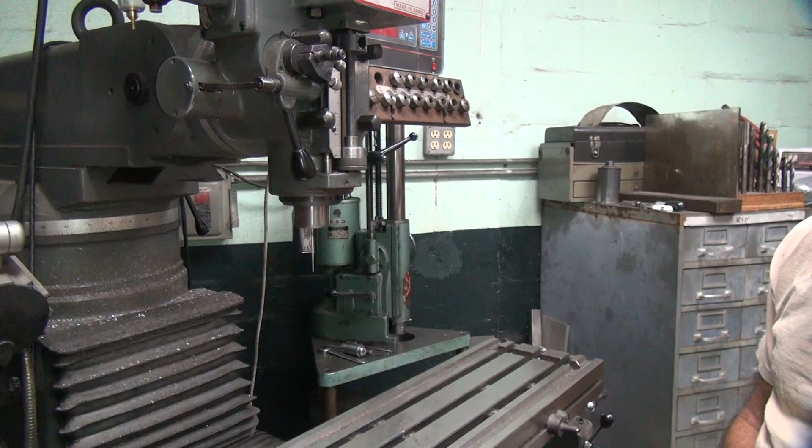Now you got a light on. Yep, lights on, both of them. Okay, we're straightening a needle that he doesn't want me to use, but I don't give a shit. I'm still gonna straighten it. So I put it in my collet up in here, and I'm above the point where I think it's bent.

So you roll it on the thing here. You can look at where you think it's bent. Looks like it's bent right at the black area here to me. So I put it just above the black area. It'd be nice if I had a chuck I could use, but I don't think it's that small, so we have to use a collet.

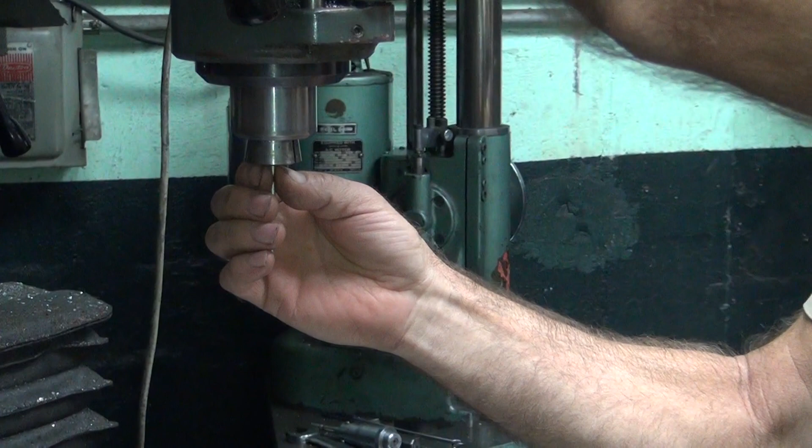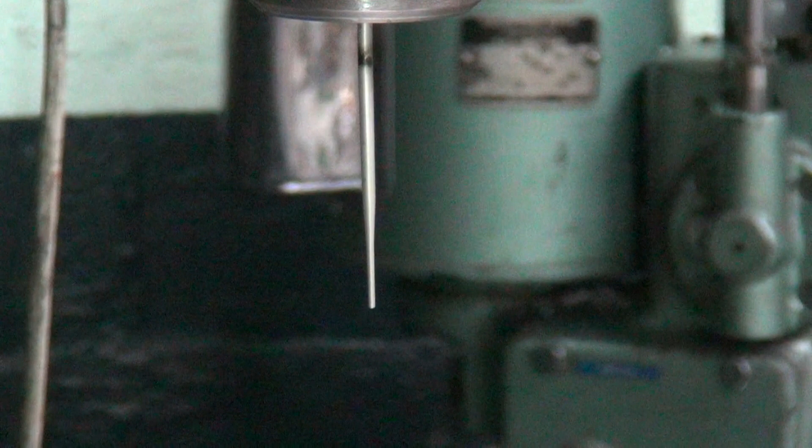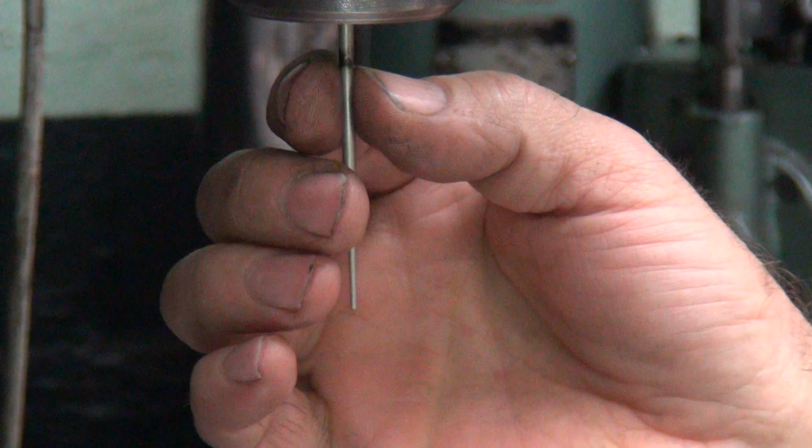So then you just turn the machine on, look at it. You see all the bending is right basically where the black is. It's got the wobblies. It's got the wobble to it. Oh yeah. It looks like it's bent right at the top of the black spot. So we're going to put our thumbnail right on that spot.

Right spot or too low? Too low. What I don't like about this design, you can't control exactly where it pinches at. Okay, that looks like the right spot. See where it's at? Oh yeah, yeah. Needle tuning.

You can actually put an indicator on there if you want, which would be a lot easier to do probably in the long run. I was thinking about that. Just keep doing like I'm doing it.

Fine tuning needle runout. See, that's close enough to run it right there. But it just bounces around the hole anyway. All they do is bounce around in a hole. They're not precisely held anyway. But we can make it closer than we got. Put it where you can see, I guess.

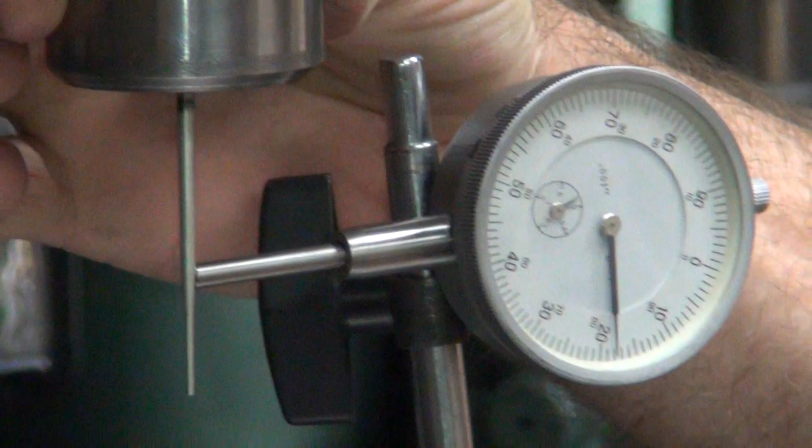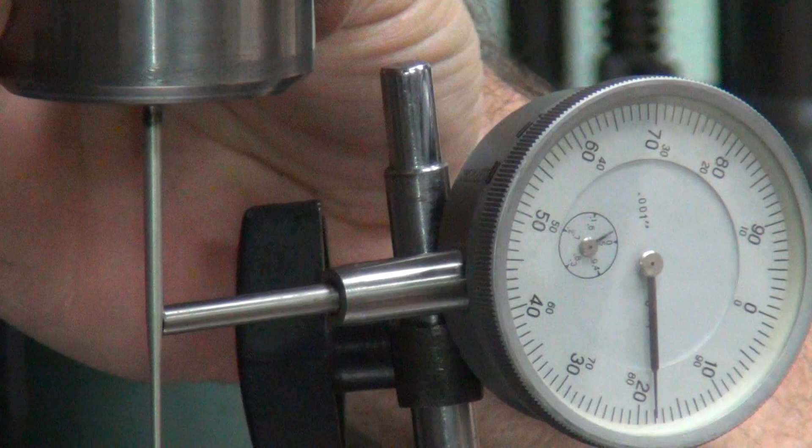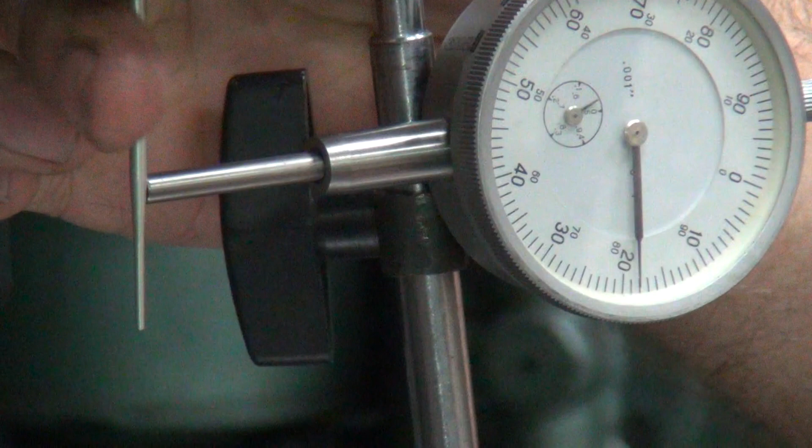So the high spot is here, which means I have to go that way. The low spot over here means I move it toward me, so I push this direction. See how the needle goes up? Mm-hmm. Now you want to go about halfway is what we're trying to get to. You can see how tough the needles are.

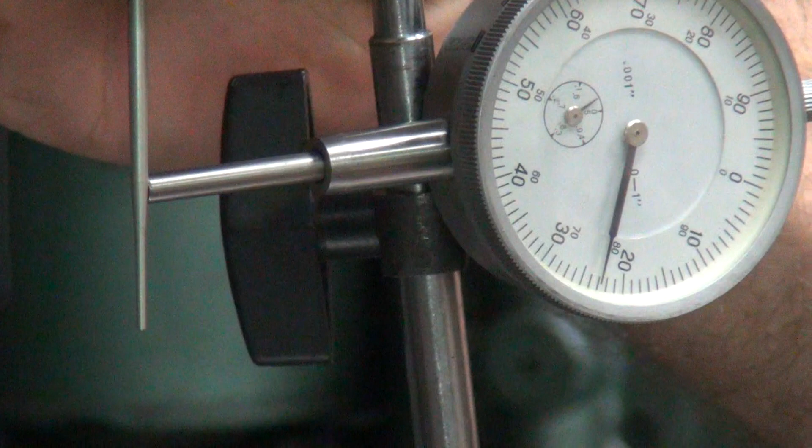If you want to know if you make it worse or better, you mark it so you know where you're at. You get to a number, I know where I'm at. So we got 1 thou. We're dealing with thousandths right now. See? Well, it's actually pretty damn good.

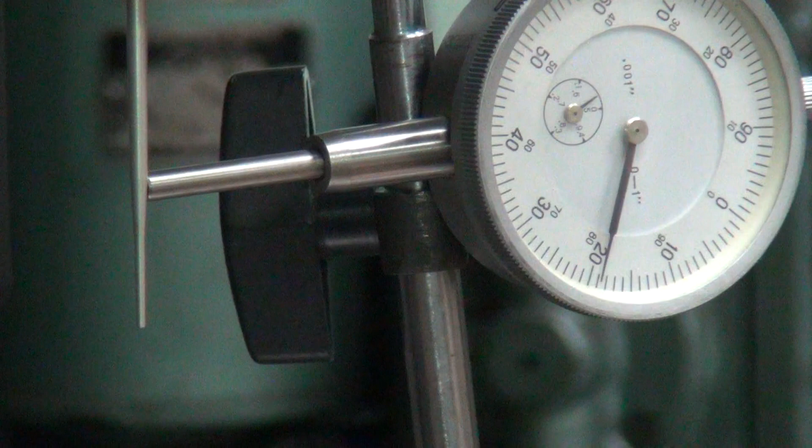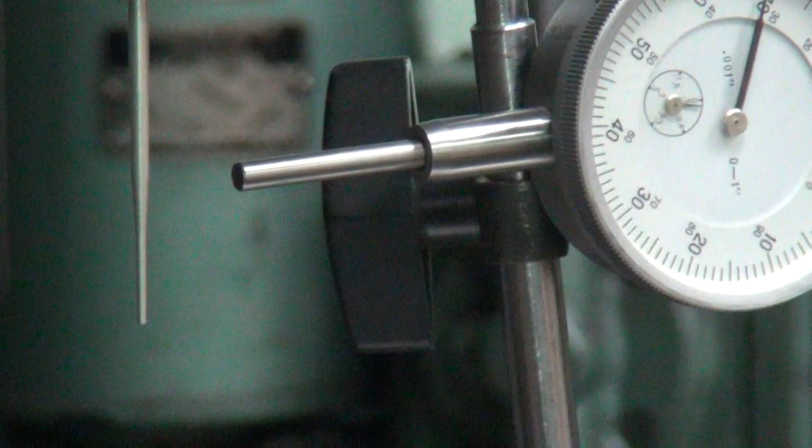You broke my needle. That's awesome. So there's one bent needle within a half a thou or within a thou of being straight. You think? Bent to unbent. Yeah, bent to unbent.

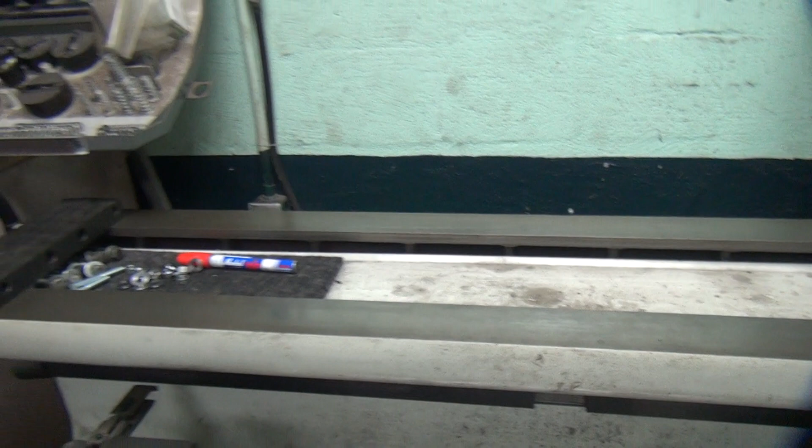Roll it on the table and see if it does any more stupid wobbling. See how it looks good. This table's pretty rough to be rolling on. Roll on top of the table over there. Flat table. Roll up on top of the weight now. Does it look pretty flat for you? Just by feel, it looks. Yeah, actually, it looks really good.

You see how tough that material is they make it out of. It's pretty damn stout. There's a lot of pressure putting on that to bend it. Check this out. That's pretty straight, huh? Yeah, it's not hesitating. Rolls evenly. Okay. You happy now? Can we reuse it? Yes. You're okay now? I'm okay.

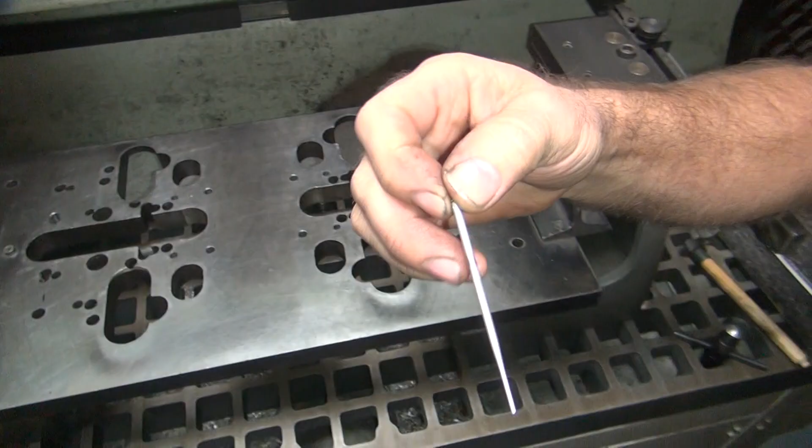So if I didn't tell you this before, you wouldn't know anyway. That's correct. But I knew, and therefore, it made a difference. But now it does not. So you're happy with the half a thou runout? You can tolerate that? I can tolerate that. Okay. Good. I'm glad you can tolerate that.

I'm curious as to how much a factory needle has. You'd be surprised how much they rattle around. That's what I'm starting to think. Okay. Let's see what I did. You moved it down one notch. One step richer. And what size needle is that? Stock. Stock needle, one step richer.

So when you pull it out of the hole here, it's higher up, it gets richer. The hole gets bigger. Yeah. When you pull it out, it gets bigger. Gotcha. You put more fuel. So when you lower the clip, the needle goes up because the clip doesn't move; it stays constant. So if you go up that way, it reverses it. So there you go. Now we are one step richer on the needle.

You can go all the way to the bottom if you want to, but we just wouldn't want. That's enough to start with. And I'm going to order up the other one anyway. And the 45 and 48 are the same, but not the 42. I thought the 42 and 45 were the same. No, it's 45 and 48 are the same. So don't forget. So when you go down to your local Harley Davidson dealership that stocks parts, make sure you order a 45 or 48 needle and not a 42.

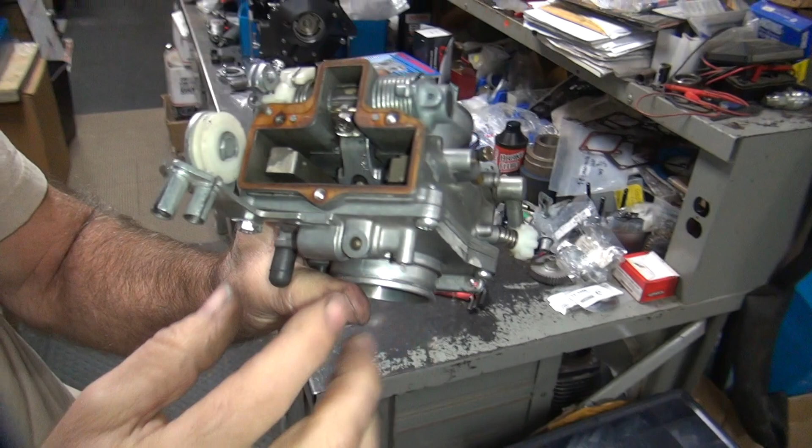Okay, there's your little washer. Now that is important to have that washer in there because that's preset height. It's built in. Okay, so now we can go ahead and drop that in the hole. See the hole way down in there? So you drop the needle back in the hole. See, it gets hung up on the washer. Yeah.

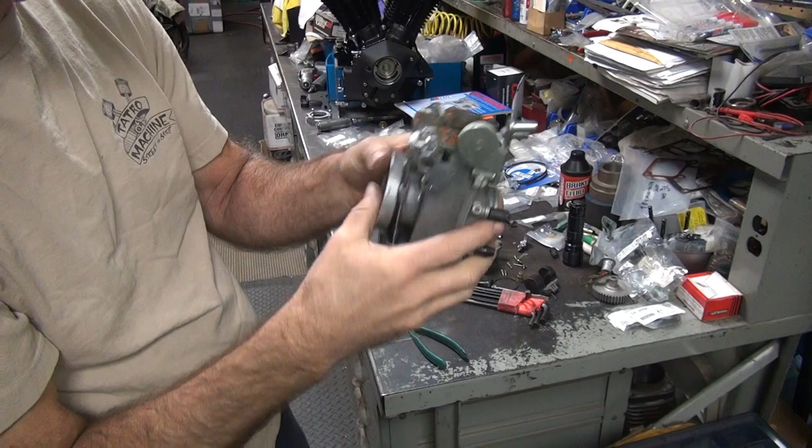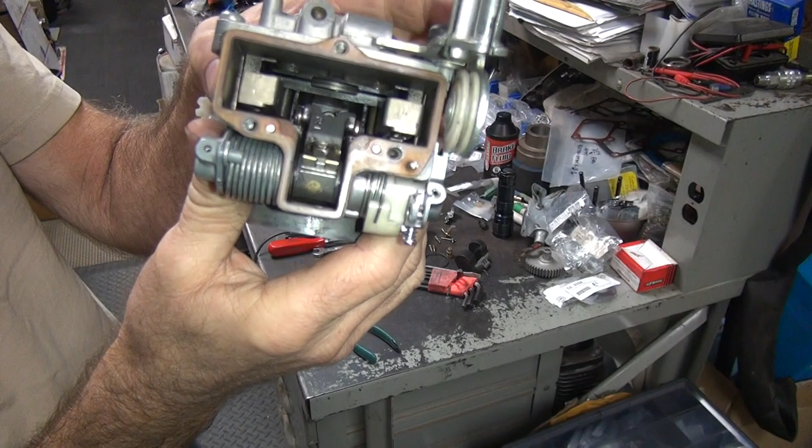So you can either pull the needle up, let the washer drop down, and drop the needle, or you can come over here and unadjust the slide. At some point, the needle will drop. And it didn't quite drop. There it goes. Light push. Because if you drop the lever down, there's more room for the needle to go through. See how it's in there now? Okay, now, if you wiggle it like this, did that little clip fall in or is it still hanging up there? I can't see.

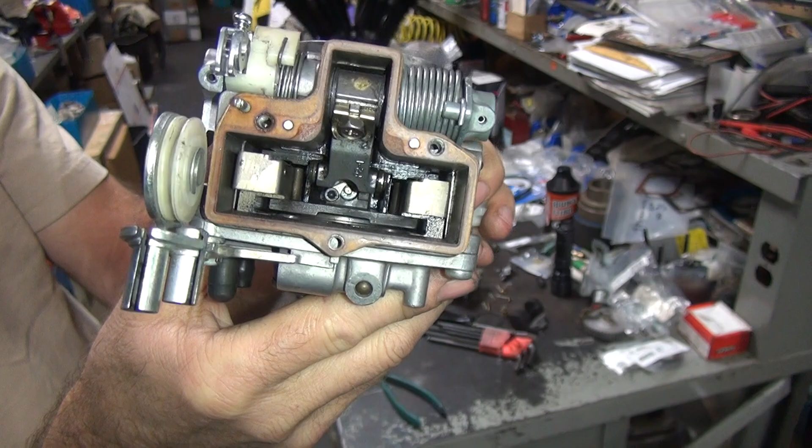You have to look at the camera. I can't see, man. I'm blind. You can't see, you're blind. I'm blind too, because I can't see because it's dark.

There. See that little lever flip down there? Because I'm using gravity. Oh, the little, yes. Okay. Yeah, it drops, so it locks the needle in place. Yeah, that holds on to the top of the clip. Can't let it come out. Awesome. Gotcha. So I let gravity work for me there because I knew where it was. Okay, now we had that long Allen wrench someplace. There's a wrench somewhere. It might be over my pile over here. I don't remember where I put it.

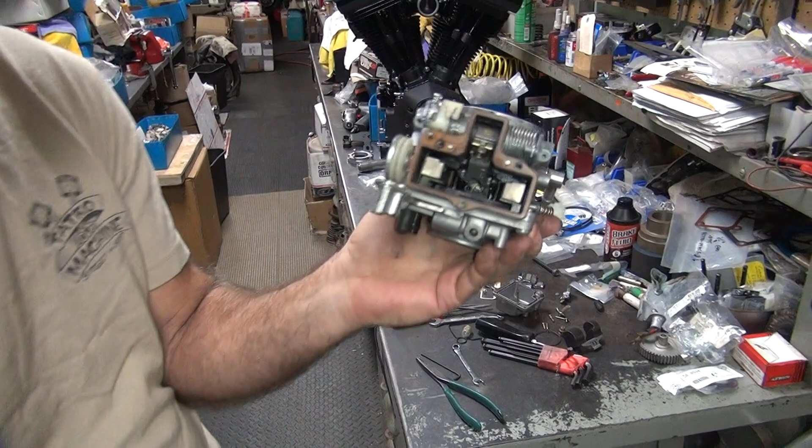Okay, now you tighten this up. See, I don't have the right wrench. We make a correct wrench right here. Tough enough. Now you look at it to make sure the needle didn't move. Appears the little lever thing is in the right spot. Yep. Okay, there we go. And when you open this thing up, right there, they really do float around in there. You see the needle moving around? Oh yeah, big time. Do you think that half a thou out of round is going to hurt that either? No. As long as it goes evenly in the hole, it don't really matter. All right. So they don't have to be perfectly straight, even though we get it pretty good.

Let's see. I need to put the idle speed back up because I turned it way down. Remember? Back off. Okay. So I got a little bit of air flowing through there. I don't know what I need, so I just give it a little bit. You may have to make a quick adjustment when it starts running. Okay. Now we have the rest of the stuff we got to put together. We got the accelerator pump in here. Spring on there. The rod is still in here. So now we need basically our float, which we don't have yet. We don't have a float needle.

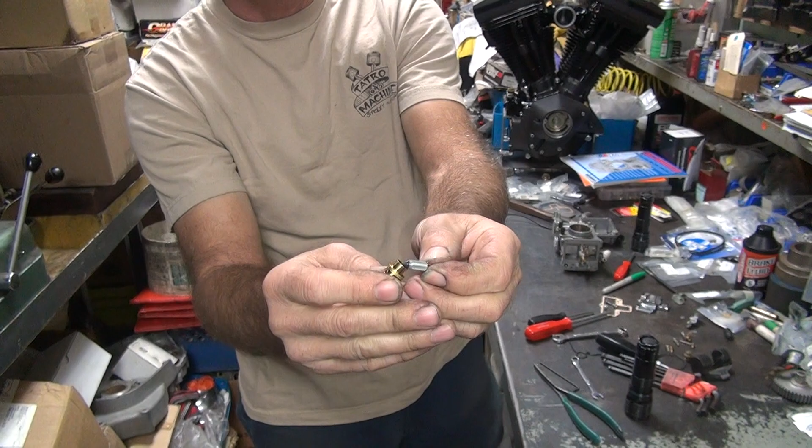And we have a brand new float needle over here that you wanted, because that other one was defective. It was old. And it was missing the washer. It was missing the O-ring. Now, the lack of O-ring seal was probably the biggest thing. So there's what a new one looks like. Nice fresh tip. Oh yeah. So this goes down inside the hole. Just push it down. There should be some kind of a retention device that holds that in. Not these broken pieces I did. Those are custom. Okay, there's a pin here.

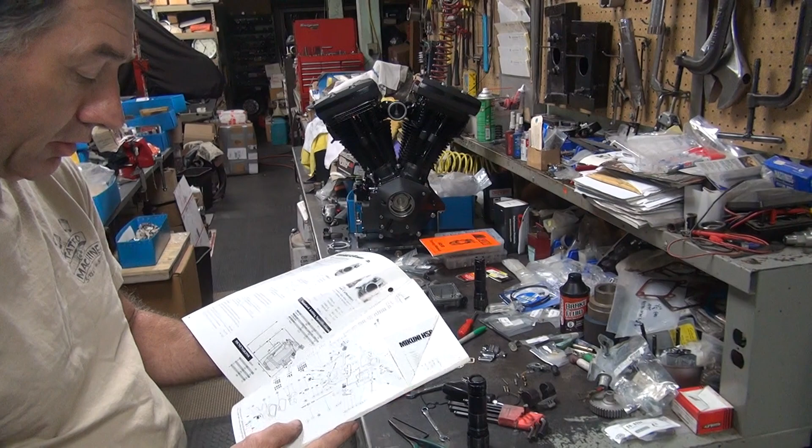So I don't see the thing that holds the needle in. Let's look at the diagram. Looks to me like there's probably just a screw that does it. Looks like it just has a flathead screw that hits against it. So go in the comic book and see what holds it in. Let's see here. I'm thinking that little screw right there on the side is what holds it in. That'd be number 64. 64 is a VM 12 216. Screw with washer. It could be a needle valve.

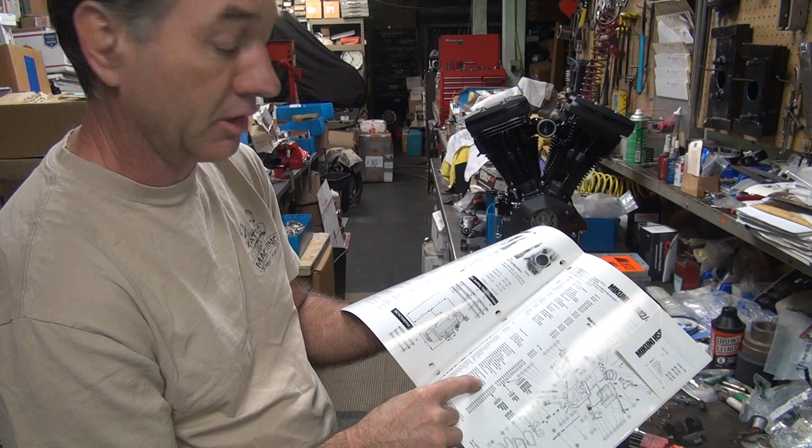It's gone now. I lost it. Fell in the hole, but it won't come out. I like how the carburetor stands up. Oh yeah, self-standing. Self-supporting. Yeah, it's got a little lean to it. Perfect. So come here at an angle. You see. Oh, that's even the right size screw. That's even better. Look at that. I like that. I'm thinking that's the right part.

Now you see a little screwdriver slot right there? Yeah. That adjusts the squirter right there, the direction of where it squirts. So if it's not squirting in the center, it squirts off the side. Go in here and adjust that and put it back in. Really? Yeah, that's how that works. Nice. It's got like an O-ring on it that holds it.

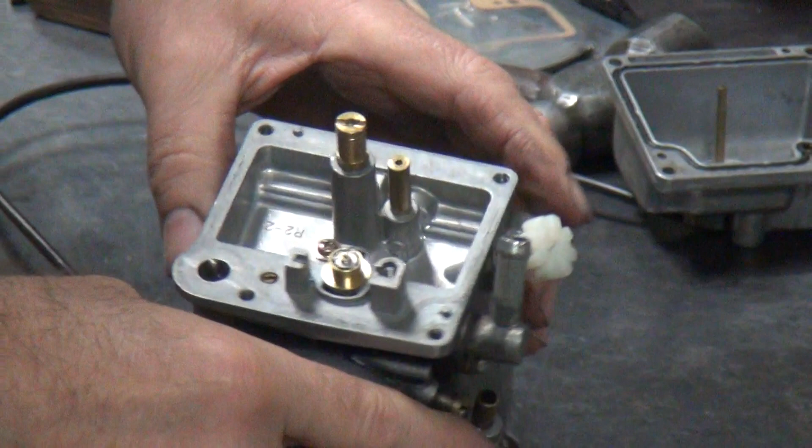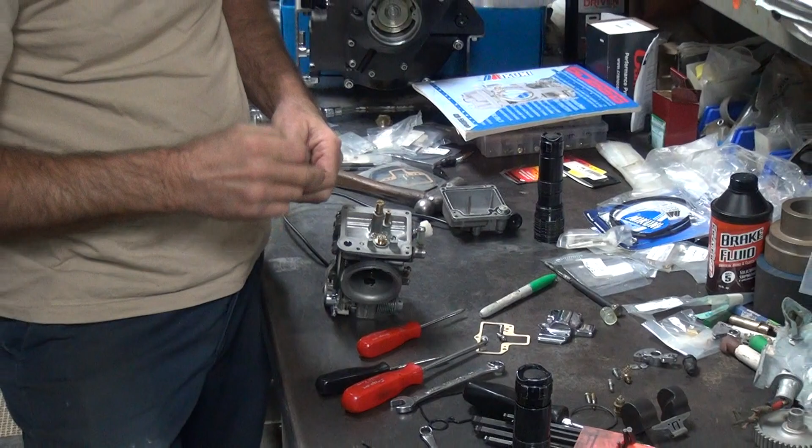Simple. Okay, so we have our needle, we have our main jet, we have our needle jet, or needle valve in there. I call that a jet. They call it jet, needle jet, or something. I forget what they call it. It's a damn needle. So we got that all in there. Okay, so we're pretty good. Now, you know what we don't have? We don't have a float needle retaining screw. That might be where that screw is actually supposed to go.

So here's our float. Probably should have been something that supports it. This has a little hook on it. Probably goes right over here like this. Yeah, right on top of that little. Yep, that's it. Ding, ding, ding. Winner, winner, chicken dinner. Is there a little pin that goes? Yeah, but the screw I think we just used on something else. Whoops.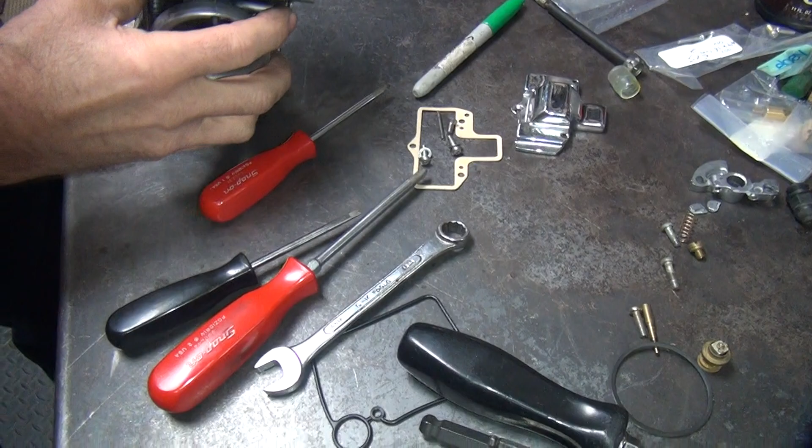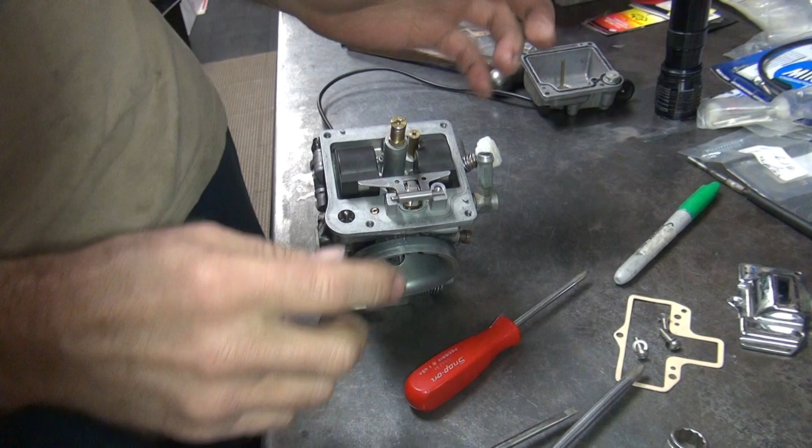I bet you that screw we used goes on top of this. Or there's another screw that we don't have. I guarantee there's another screw that we're missing right now, because I don't see it in all the parts that came out today. And I know they would have been there originally, because we have all these other valuable parts sitting here. It's hard to believe we don't have the one we need. And my guess is that number has the same identical number on it. It seems likely. It appears to be two different ones though.

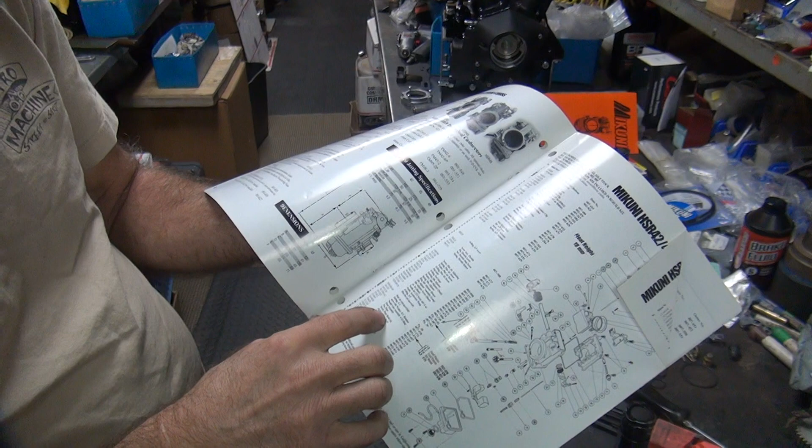Really? See, the 64 had that large washer, which we did use on a needle valve. So we used the right one in the right place. But the little small one here, number 68, we do not have. So 68 appears to be a screw float, 4. That's a float bowl then. No, I don't think that's what we're looking for. We're looking for the one that holds a needle in there. So what's 68? That's not the same one that goes in the float. These are 74. These are float. It takes 4 of those. I think they got their numbers screwed up.

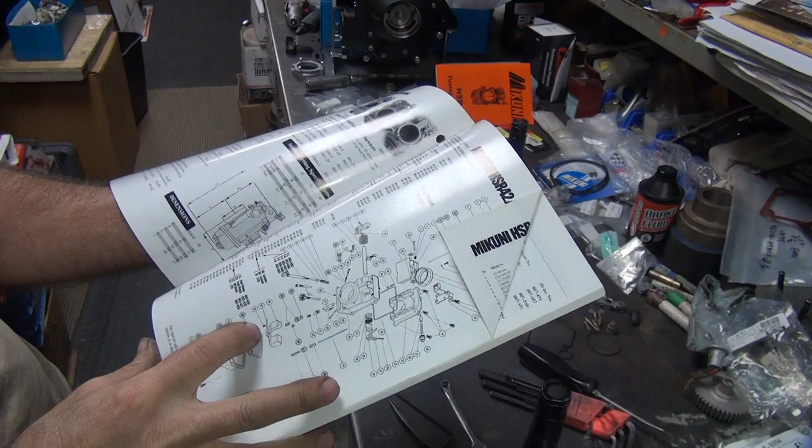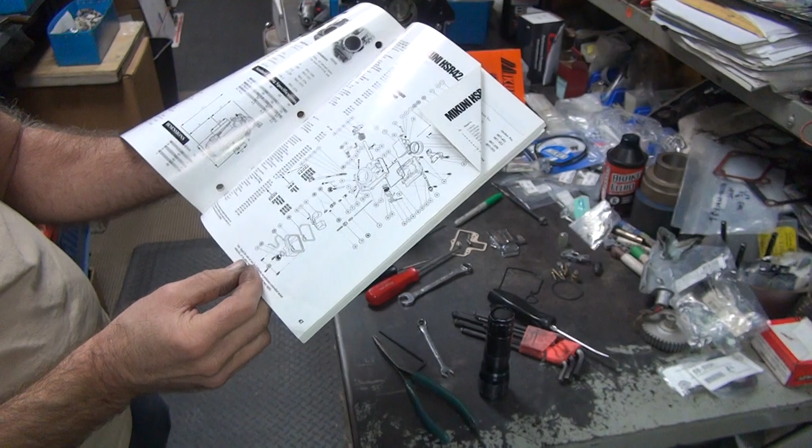Packing float bowl, screw float bowl 4. That's not a float bowl screw. Number 74 is a float bowl screw. Screw float bowl 4. So they have 8 float bowl screws where there's only 4 used. So I'm thinking that description's off. Pretty sure it's not quite right, when Mr. Mikuni translated that into English.

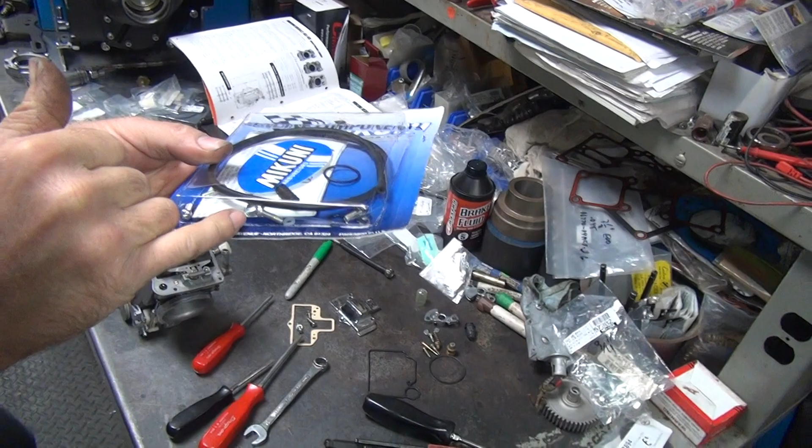So it appears that we have another float retention screw right here. I'm thinking that might be the same size screw that we're going to need to hold that pin on there, even though they say it's not the same one. I'm not above using the incorrect screw if that's the one we got to use. Okay, it appears to be the only small screw in there. Now we can go over here and look through my junk pile. I don't think I bought any of those. I have lots of other stuff over here.

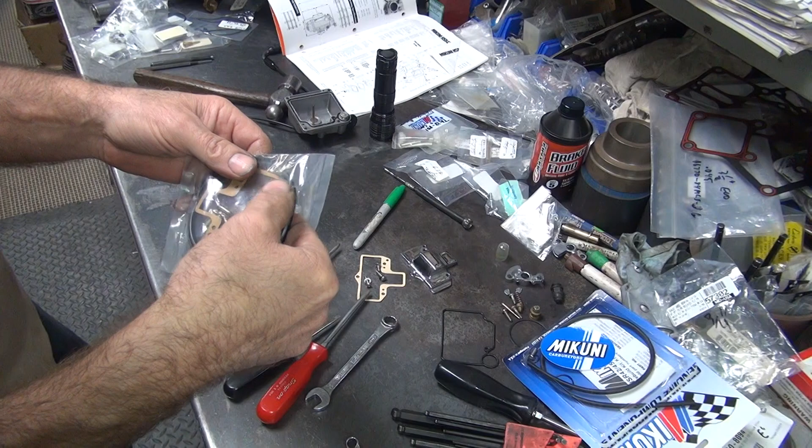Ooh, look at that. What's that all about? Oh, there we go. There's another one of those screws. Let's take it out of there. Appears to be a lot of these. Let's not rob that packaging. Well, I'm still missing parts out of that kit. And that appears to be the same thing, and it looks large enough to cover over the pin. Well, this one's all in a bag. It's not going to fall out. This one here is going to fall out, so I'm going to use this one. The trick is to get it out where I can find it again. There's that new needle valve washer we should have put in there. It's too late now.

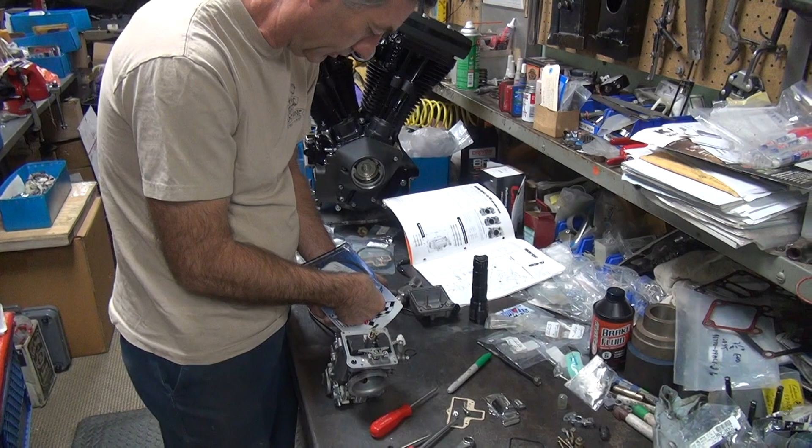Okay, I took one of the float bowl screws, got the washer on it. It appears to be doing the job for a float pivot screw. They did say with the float bowl screws they're supposed to be in there, so that's right. Okay, so now you got to set your float. Remember how many millimeters it was? 18. 18? 18 millimeters. How much is 18 millimeters? 2 less than 20. But more than 17, right? One more than 17. I can use this one over here.

Got my metric conversion machine over here, see? So you put on millimeter. You go to 18.02. .02. 18 even, see? And you convert: 710 thousandths. Got that? I got it. 700 thousandths. Take your metric conversion machine over here, which has no metric on it. You go down 7 lines, that's 700 thousandths. That's what your float should be at.

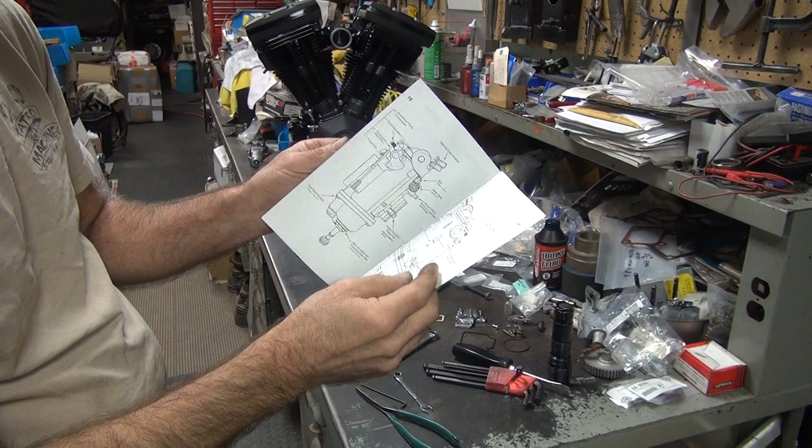There's that piece I broke off. Ooh, yeah. You don't need that extra weight. I was saving some weight. Well, that makes the bike faster.

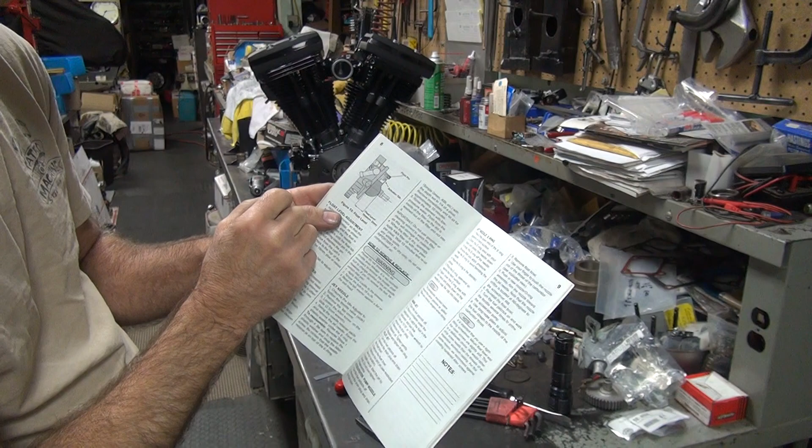Okay, so center line, plus or minus 2 millimeters. That's the center line of the bowl. So it's in line with the jet. So it wants you to measure it with the carb laying down, at an angle like this. And you have a 2 millimeter variable. And we're at 700 right there. See right there? Let's get the camera up where I can see it. Oh, yes. That's right. Just a tick over that 7 line, right on the 7 line, depending on where your float stops at.

See that? If you put gravity on it, it'll drop. See how it drops? My arm's in the way now, but it drops because now the weight of the float is overcoming the spring. Okay, so it's adjusted correctly. Which makes sense because it was all brand new already, parts were in there. Brand new setting from the factory. So it didn't change any.

Alright, so where's our float bowl at? This piece over here, somebody was not happy with the original components on this one. It's always nice to get a fresh gasket. That way you don't have to turn the petcock off on the race line. As you so elegantly put it. Yeah, but on a nitro bike, the little leak doesn't hurt anything. It sucks so much fuel, it doesn't matter. This is noticeably fatter than when we took it out. Almost like this one might not be collapsed yet. The nice seal it'll provide.

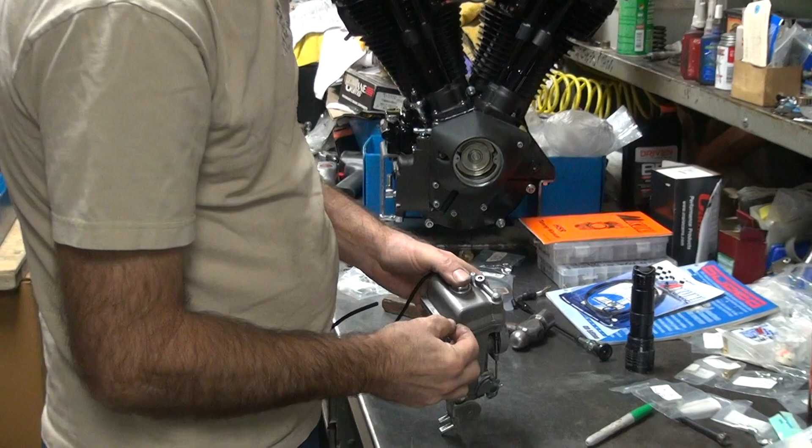Okay. There you go. So you got your needles in there. They're tight. Screws are all in there tight. Put that in there. It should drop straight down, no effort. If you have to put effort on it, it's not good. Okay, we have these brand new screws that came in the kit. They have no lock washers on them. We have 3. How many do you want? I'd like 4. One more over here on the side.

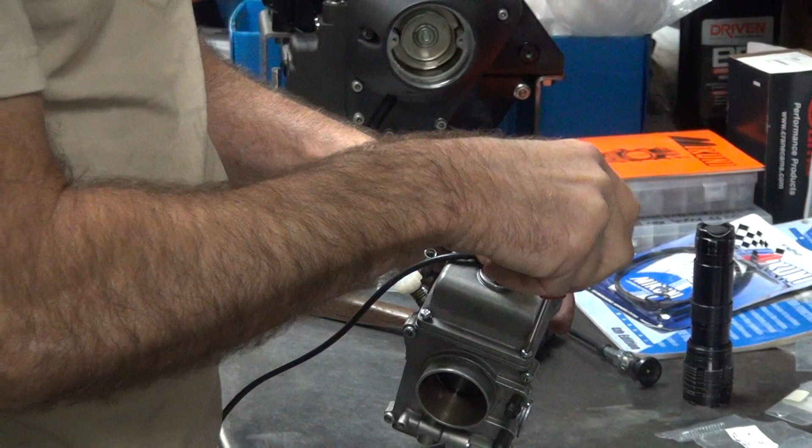You didn't roll it over there, did you? I think it rolled itself. Rolled itself. Those are the self-rolling float bowl screws. Self-adjusting. I pay extra for them. Yeah, that's right. Shiny ones too. You like that shiny part. You know what? I like to get them shiny and then buff them on the wheel to make them a little flatter. Then they get rusty. I think I get a 10,000th of horsepower out of that. 10,000 more horsepower.

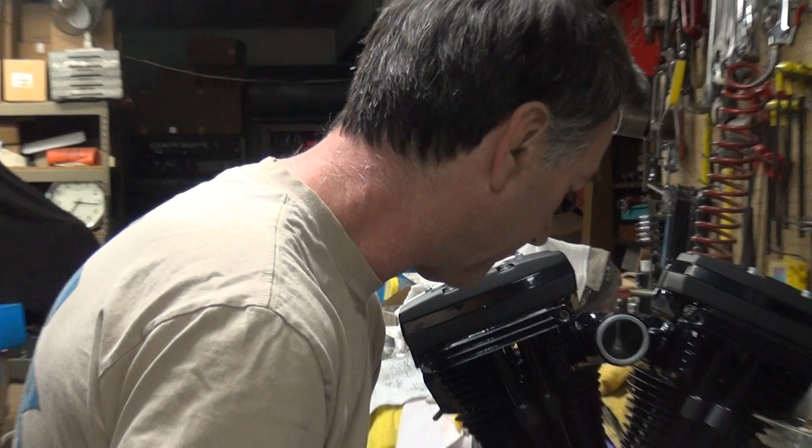Okay, we got a screw that works. Not that one.

When you're dealing in the 10,000th of horsepower, I have a hard time getting a tuner that can actually adjust to that. So until they get the skill set where they're operating at my level, I'm just gonna have to go by feel. That's it.

The time slip never lies. Time slips do not lie, except when they don't work. Yeah, until the machinery goes down. Except when the dust blows through the timing light and gives you a false speed. Right. Or it decides not to work because the battery died.

That happens too. Okay. So somebody was having a coronary about the brightness of this cover. I'm not sure what the problem was. What was the problem? Well, it created more drag and slowed the bike down. The coefficiency. Oh, that's what it was. Yeah. It was all about the coefficiency there.

Look what I found. Ooh. Is it going to be wider, though? Because that body's thicker, right? I don't know. You want to hold it up to it? Because I think they wouldn't change that. I love your intention, but I don't think it's going to matter. It's the same. Ooh.

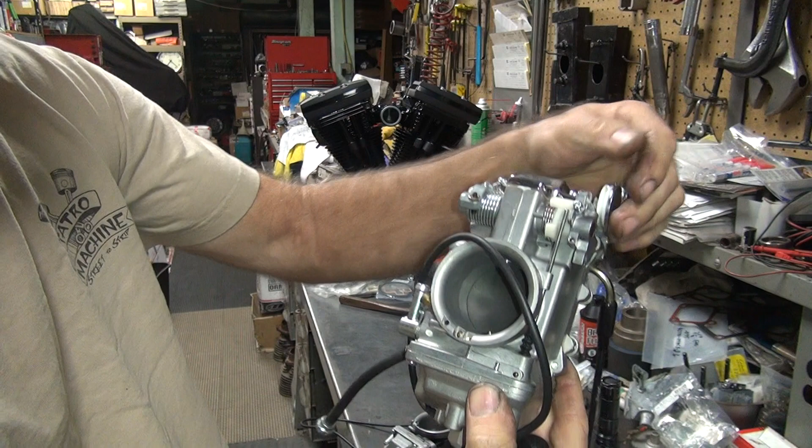So you kind of see what kind of movement we got here. So you got about that much free play in the top system, right here above it. Basically the thickness of a screwdriver is about what that is. Yeah, loose screwdriver. So we go over here and look at this one. Got about the same amount of clearance on that one. Okay, so this one here.

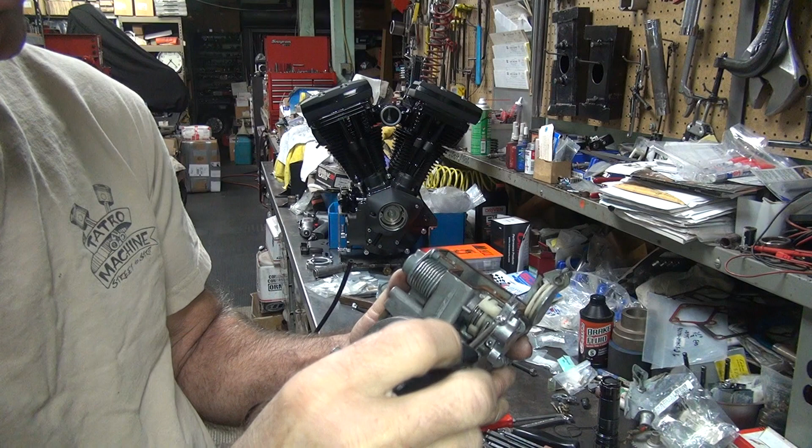Okay, that adjusts how much pump you got right there. This rubber here has a little drag on it, so I need to put a little CRC on it to lubricate it a little.

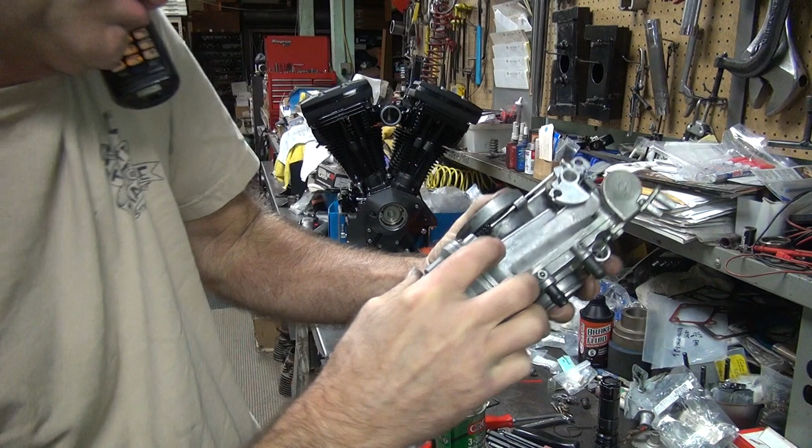Another interruption on the phone. Hello. Yes. Yes. I'll be here for a while. I'm working on the bike. Okay. Bye. We've got some more secret visitors coming.

Okay, so let's get that lubricated up there. Okay. See, the spring down here has to overcome the drag on that boot to return it back up.

It turns pretty slowly there, so not exactly working very well. This plunger down here doesn't have a lot of pressure on it. I think we need to get some fuel in there or something to make that work better. So this rod is not really returning like it should be right now. It goes all the way down, but it doesn't want to come back up. Slowly rising though, if you watch it. The spring is too weak to overcome the drag on the boot.

So I pull it all the way up. I can feel where it just hits right there. So eventually it would get up to that point, but right now it's not coming like it's supposed to. So hopefully we get some lubricant in here, things will start to work, because right now it's a little bit tight. Okay.

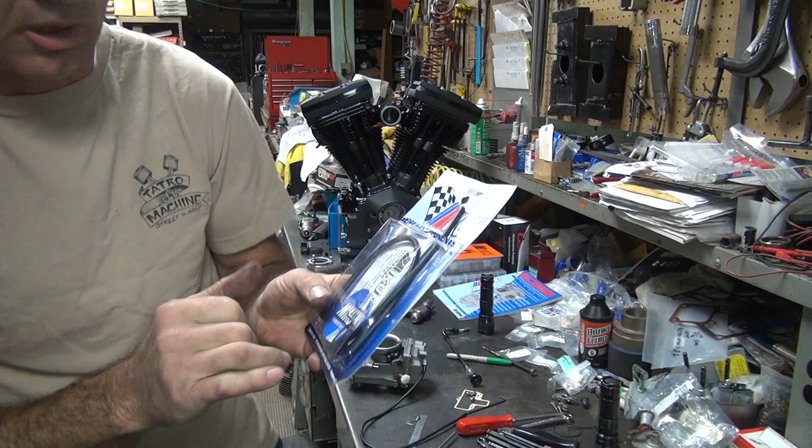Okay, so there's the seals we got. It looks like there's 2 O-rings in here that do the sealing. In case one doesn't work, the second one does. You can see how the first one's pretty well collapsed, the second one not quite so bad. So let's see if I'll put some new O-rings in there. Probably these little ones right over here in the corner of the package, would be my guess.

All these little parts out. Okay. So I'm gonna try to get this out of here. My thumbnail isn't quite getting the job done. Get a little pick.

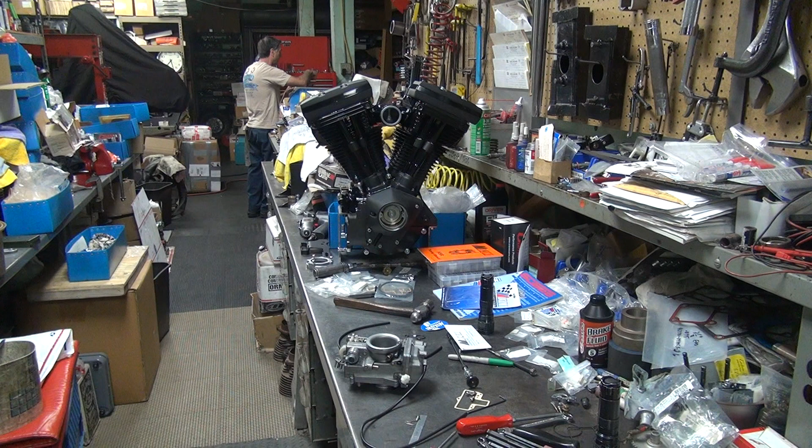You put on there? You're not blowing my cover, are you? Uh-oh. I think I am. Could use a heater. He's over there blowing my cover.

Okay, there's the O-ring. One of them's coming out. That's one out. There's number 2. Number 2. Got this set too high. Okay, there's the first one on. And there's number 2. Number 2 has to go to the second groove though. There we go. Number 2 is in.

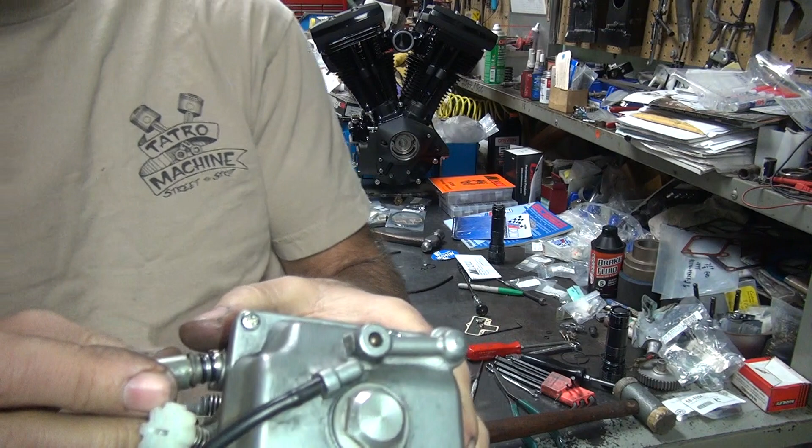Okay, run your fingernail around the O-ring to make sure it is unwound. No twisties are allowed in the O-rings. They don't work very good. Okay, there we go. That should go back into the carburetor relatively easily. There we go, look at that. Ooh, that has a nice free spin to it. Okay, put your clip back on in there.

Your screw. Oh, you missed it. I'm done almost. There we go. Nice new screw. Look at it. Oh, nice and new. Okay. Now, underneath this idle mixture screw is probably an O-ring buried up under there, I bet. Mr. New Guy wants new O-rings.

There's your needle. It's a filthy needle. When's the last time you cleaned up? There's a springy. It's a washer in there. Way up in there's a washer. I don't know if you can see in there or not. Somebody gotta get that washer out. When you get the washer out, there's going to be an O-ring under there.

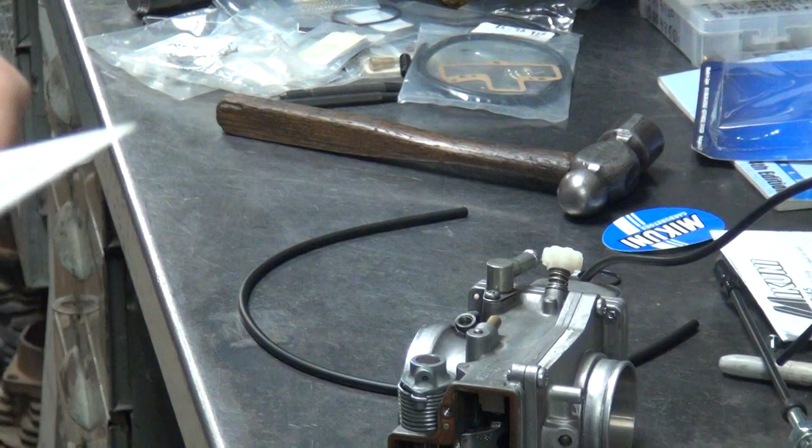So, where's your idle mixture screw at? See a little thing right there, number 52. I bet you it says O-ring on it. Ooh, it says O-ring pilot air. There's an O-ring in there. At least there should be one in there. Whether there's one in there now or not, we don't know. But there should be one in there.

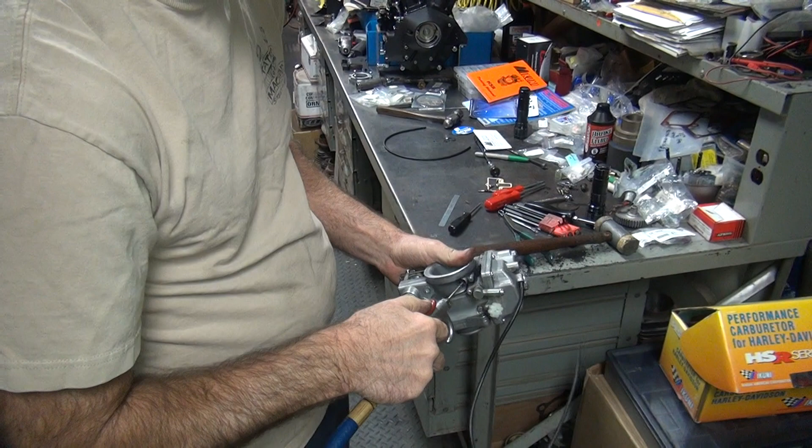Get him a little better nozzle over there. Oh. We use a little pressure. 100 pounds in here, so 170. Actually, I think it's 180. Okay. Think it's going to come out? Oh yeah. Nothing's happening. Can't shoot it from the other way. That would blow it up.

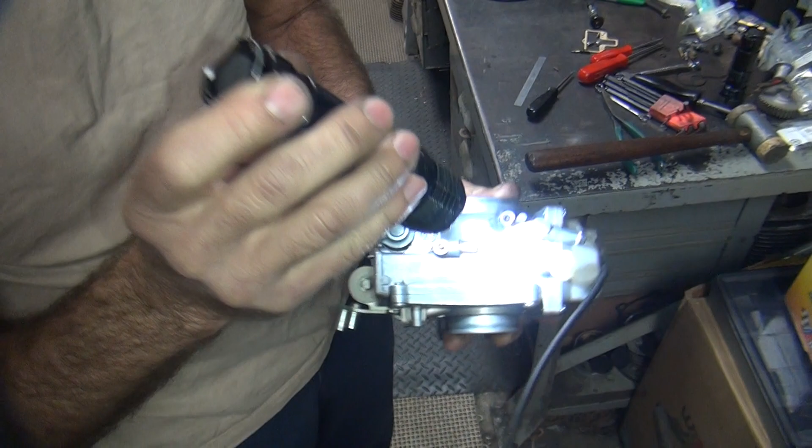All I see is just a nice shiny piece in there. See in there or not. Light help or hurt? Hurt. See the shiny bottom? Rotate around a little bit. See that shiny at the base of the hole? Yeah, you're right. There's nothing in there. I don't see an O-ring.

I'm feeling a drag on the tip of this. There's no way it would be that shiny if there were an O-ring in there. Yeah, I know, it would be dull. No, I don't think there's one in there. Well, luckily we have an O-ring over here. We have two. We got a big one and a small one. So let's see what the big one looks like. I'm thinking the big one matches the big washer. What do you think? Oh yeah.

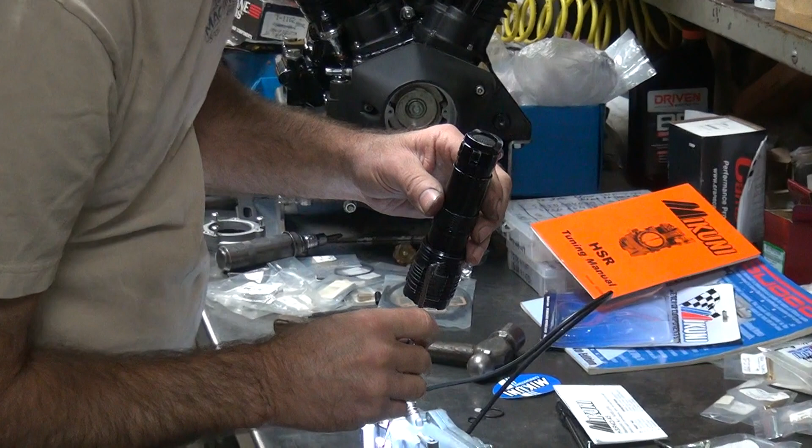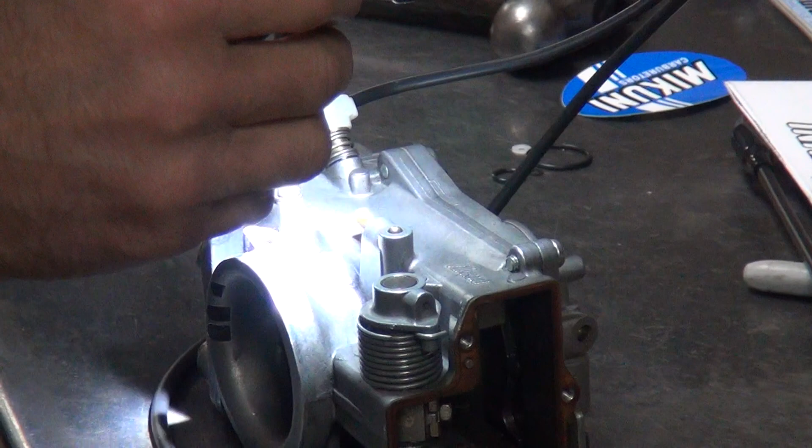Okay. So this is my installation tool here. So I'm going to flip it around. Got the washer and the O-ring. Doesn't work very well. The washer turns sideways. Well, the washer's sitting flat, so I assume the O-ring's in there. Then we have a spring and a screw.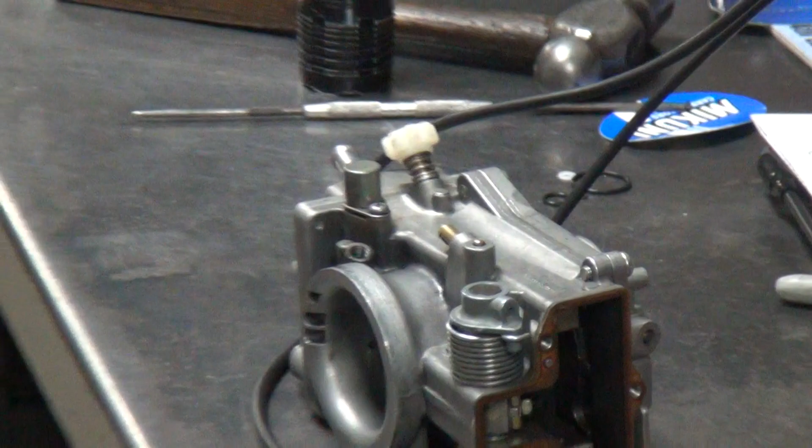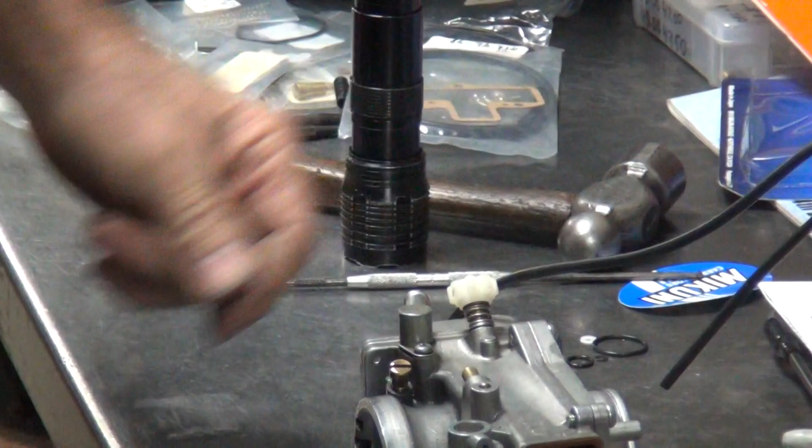Half. Feel right? 1.5, 2. 2 turns out. That's about where you start at. Maybe 2.5, something like that. It's an air bleed, so you make it richer by screwing it in. It cuts the airflow. The opposite of what an S&S would do. Interesting. You know, we got a little small O-ring. We don't know what it is for over here. I don't know what else I'd put an O-ring on, unless there's something we missed.

The pump rod doesn't want to return up because the spring's not enough to overcome the drag of the rubber booty. So it's a little stiff. So once it gets broken in, hopefully it'll start working correctly. Alright, be back.

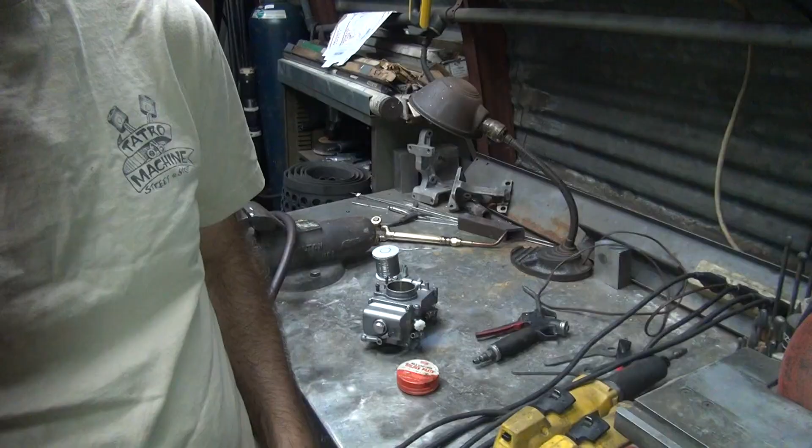Alright, we're doing some welding here now. You'll need a hammer. So we're going to put a couple of Panhead Linkert ball bearings in here. So you got some genuine parts in your bike now, in that damn modern Evo shit. So we're going to put these in here to plug up the hole.

That Evo shit saved Harley. There you go. No, AMF saved Harley.

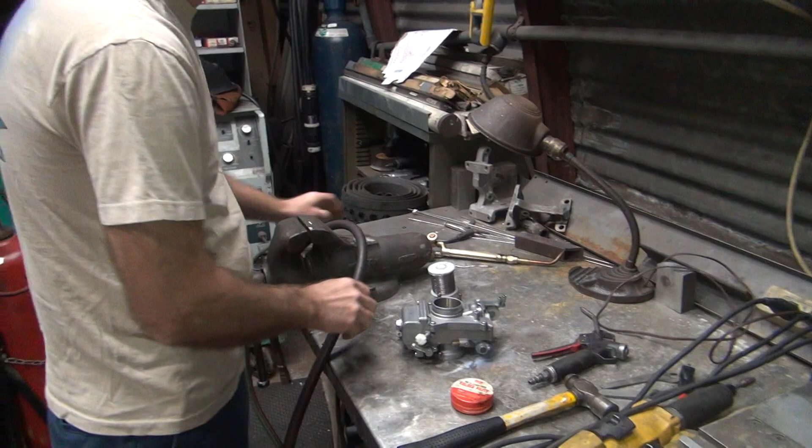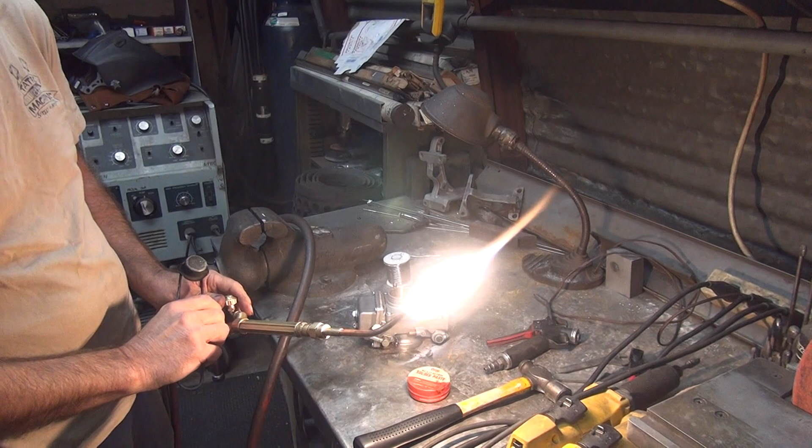So, there you go. This one just dropped in. This one here I pounded in. I'm going to solder across the top of both of these, and that way you don't fill the whole carburetor full of solder when you're filling a hole in. Even though I think you wanted me to do that. I'm going to use a little bit of heat. Not with this though. With this. Oh, it's a party now. It's probably not the one I should use. Yeah, I don't know if this stuff will work. We'll find out.

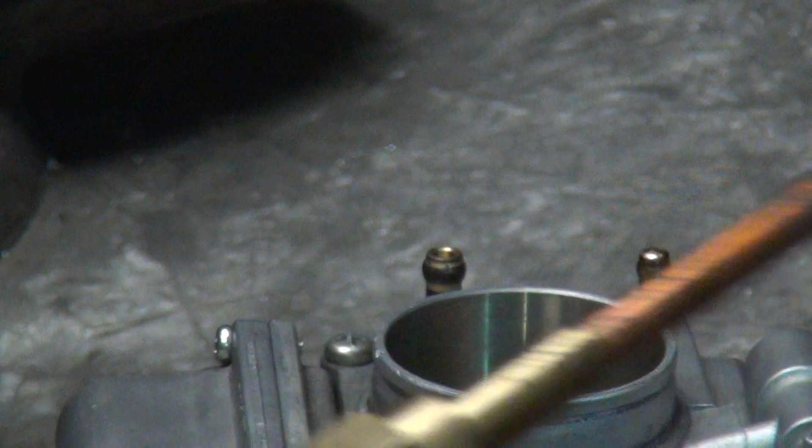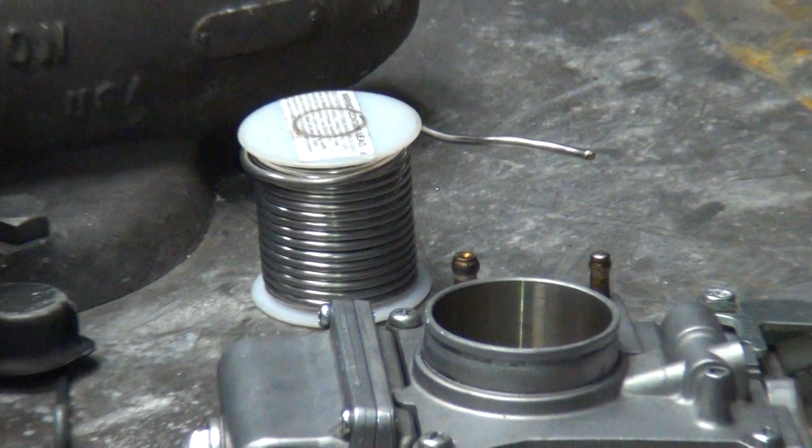Stuck. Gurgle, gurgle. Thinking that one's in there. What do you think? That's pretty good. Might be warm. With your cool down torch.

Those new O-rings getting hot? Yeah. Not really. Yeah, it's cold. Good to go. Put that in your pocket, it'll warm you up. Sweet. Alright, we'll be back.

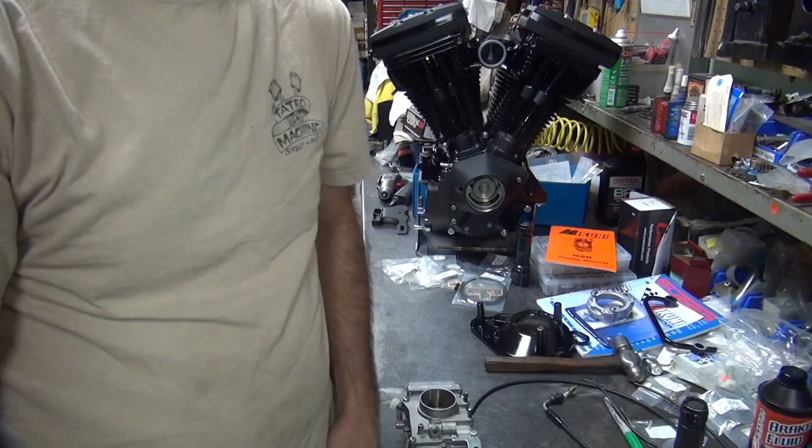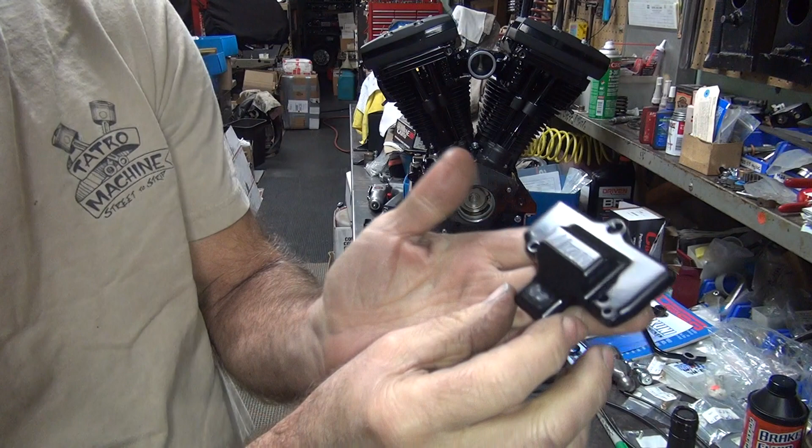Okay. We just got done soldering up the holes here. So they're good to go. So the lid's been drying. Got this custom paint job right here. He has an identifying marking right here, so he knows what it is. It's a birthmark. So he knows if somebody steals it, whose it is.

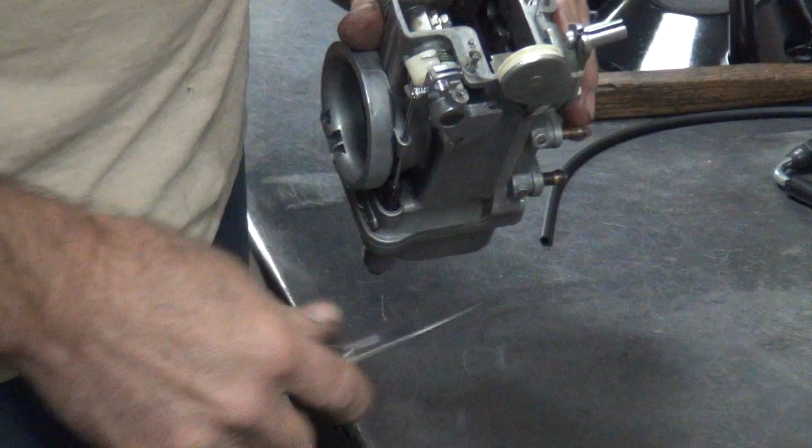Oh, we didn't change the gasket out. Oh shit. I know you want new gaskets. This gasket seems to be permanently installed on here though. You know it's going to come off in pieces now, don't you? It's coming. It's coming. Down to one corner. That was vintage hard. This is vintage new. You realize this kit's at least a year old already? Look at that. These nice new looking screws over here.

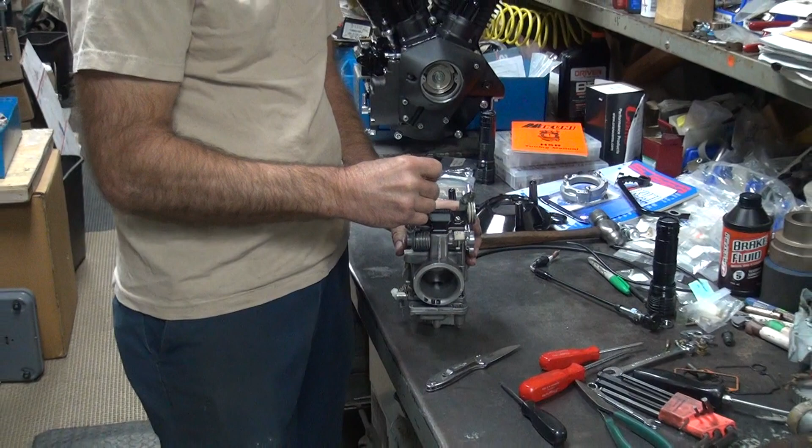So what do you know today about carburetor rebuilding? It's a lot different than a CV. Don't forget to take out the needle. That, and don't put that in a vise. Yeah. There you go. 2 things we learned today. That was definitely part of the learning curve today. Yeah. I fixed one of the 3 problems though. It's very interesting though. I mean, I'm familiar with the CV, and of course an S&S. But from a mechanical perspective, it's interesting because all 3 of them do the same job, but they're very different. Very, very different. Yep.

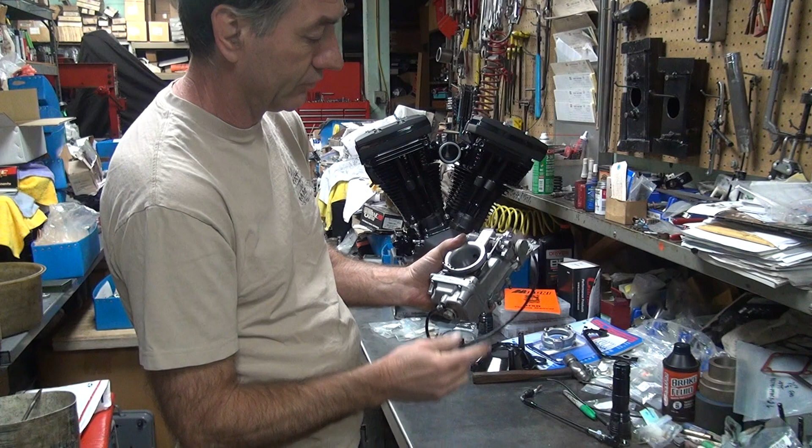Use new rubber. There you go. One brand new rebuild. An ugly black lid on there. Perfectly ugly. See, it sticks down when you go like this. It kind of comes up real slow. Eventually it comes up though. So if you hit your throttle and roll, it only works once, and it'll work for a while until it comes back up. For whatever reason. Alright, that's it for rebuilding. Get all this junk cleaned up.

Oh, no, we forgot something. Almost. This has only been in about 4 times already, I think, maybe 5. Where's it go? Where the hole is. Let's see the hole. The threaded hole. Oh, on that side. Oh, on this side. Oh, there it is. I knew there was a secret spot. A very important secret part. We're almost done. Don't cross thread it like that. There we go. Now we got all the pieces on there. It's a fully optioned carburetor now.

Does it work? Ooh, still works. There you go. Hey, your rod came back up. Alright. Gotta go on that thing now. Be back. Cool.